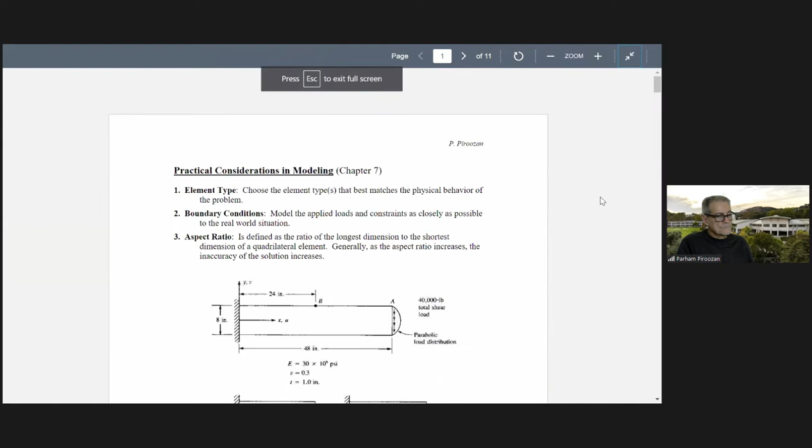Any questions before moving on to chapter 7 and talking about practical considerations in modeling here? This is module 13, we are here. All right, no questions. So today I want to discuss 11 items with you. No formulas, no problem solving, of course, for chapter 7.

This piece of our discussion comes before talking about heat transfer, but chapter 7 is practical considerations. No formulas, no problems, just discussions, but important topics we are going to discuss, which guide you how to model and solve, do finite element analysis. All right, so 11 items I want to discuss. Item number 1, and I want you to participate, ask questions, feel free to participate and tell me about the experiences you have and mistakes that you made or any questions you have.

Type of element is very important. You have to always select the right type of element. So far, we learned about truss bar elements that we use for trusses. We learned about beam elements. Beam elements we use for both beam problems and also frames. And then also we learned about the triangular elements. These are for continuum elements, two-dimensional plane stress, plane strain problems. We use triangular, for example, elements.

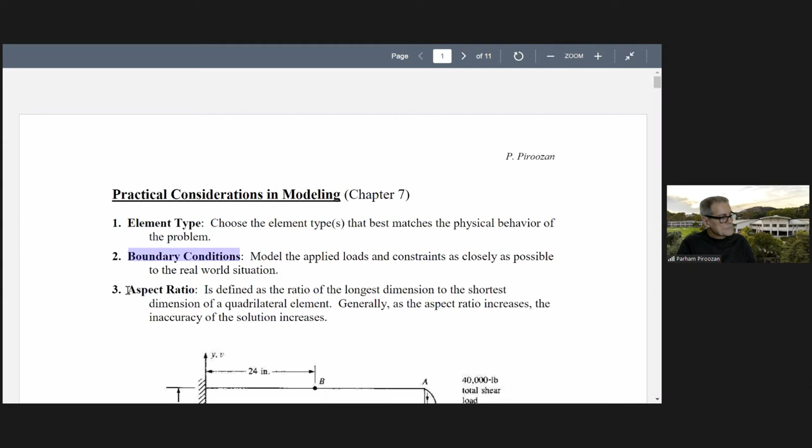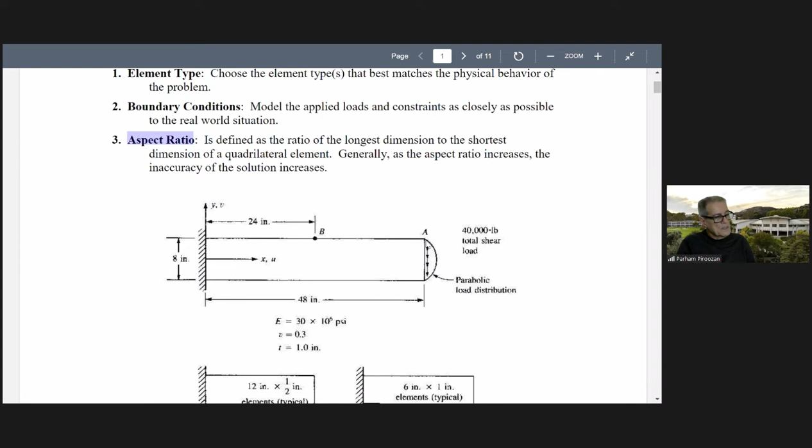Now, aspect ratio is another important topic. Look at this cantilever beam. It is fixed here, and we are applying this distributed load here, 40,000 pounds total force distributed like this. This is point A, point B. Now, let's select this element and analyze a couple of cases. One case is we are selecting an element like this. The total length is 48 inches and 8 inches. This element has a length of 12 inches by ½ inch.

Now, a definition, aspect ratio, it shows AR here. Aspect ratio is the ratio of this long side divided by this short side. So 12 divided by half is 24. And we can select another aspect ratio. Let's select this side 6 and this side 1. So aspect ratio is 6 divided by 1 is 6.

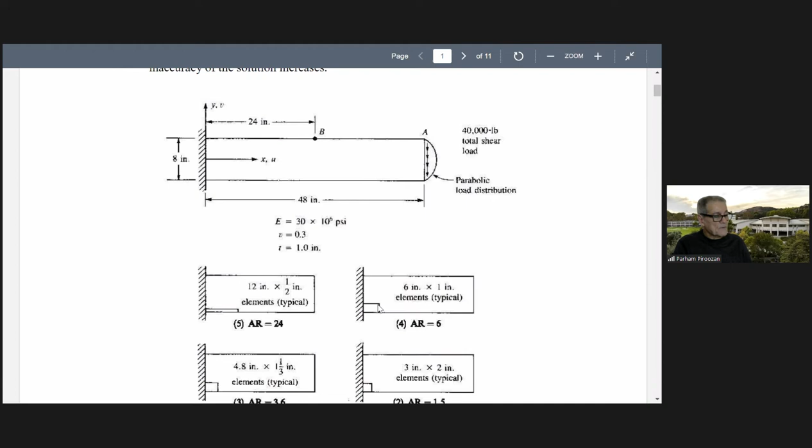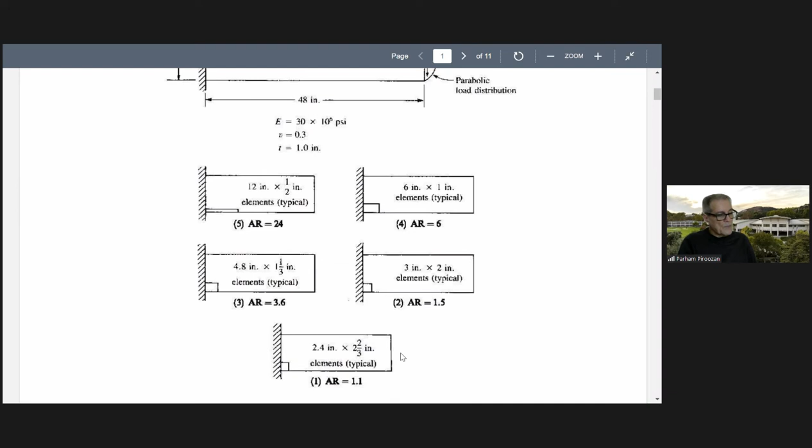Another one, aspect ratio of 3 by 2 inch. So this is 3 inch by 2 inch. So it makes it 3 divided by 2 is 1.5. And finally, this one, aspect ratio of 1.1. So we have several different aspect ratios.

We want to compare to see what results we get. This one would be the worst one. This one, not good. Don't select large aspect ratios. Stay close to 1. The closer you are to 1, the better your results will be.

Let's look at some numbers here. This is aspect ratio versus percentage error for the displacement at point A. Remember, this was point A here. This is error, this is aspect ratio, and this is the exact solution. When aspect ratio is high, it is 24, which was case 5, the error here is negative 55%. Our deflection is 55% less than the exact solution.

Another case, case 4, aspect ratio close to 6. Error is about, let's say, 25%. And as aspect ratio approaches 1, let's say here, aspect ratio about 1, we have just about 5% less than the exact solution. So you see that as aspect ratio approaches 1, our solution is closer to the exact solution. As aspect ratio increases, our inaccuracy increases.

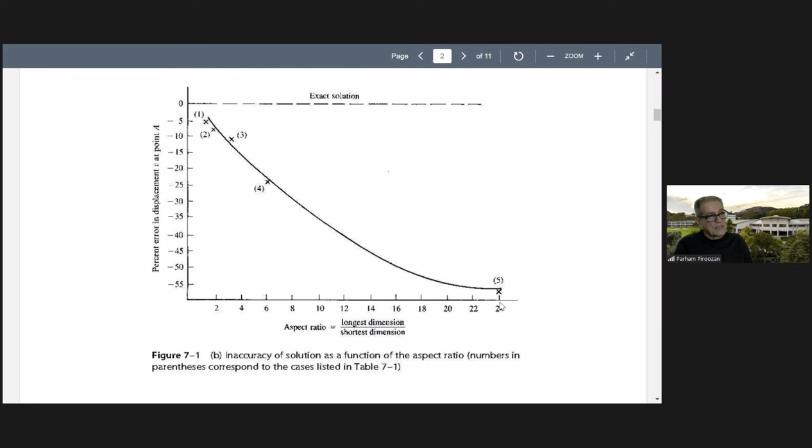All right, so this was one point I wanted to make. Another point of discussion here. This table also shows the numbers for different cases, different aspect ratios, 1.1 and 24. And these are the deflections. As you see here, deflection for point A.

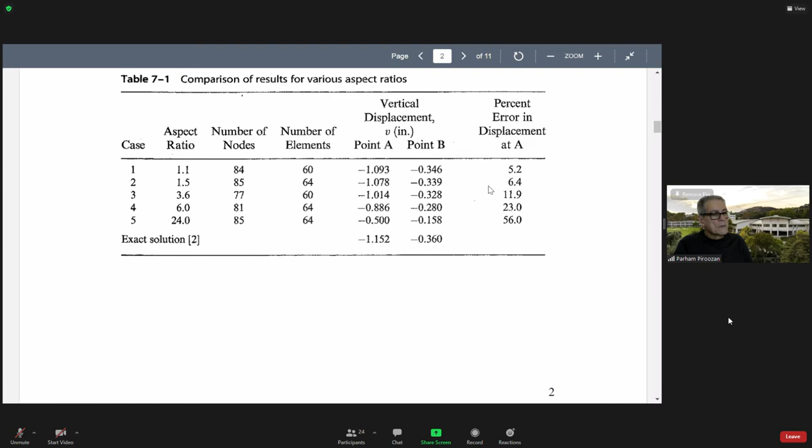Professor, can you hear us? The audio is off. Yeah, we're trying to talk to you. Hello? Let me see what the problem is. Well, I don't hear anything. If you have a question. Professor, if you can hear me, I have a question.

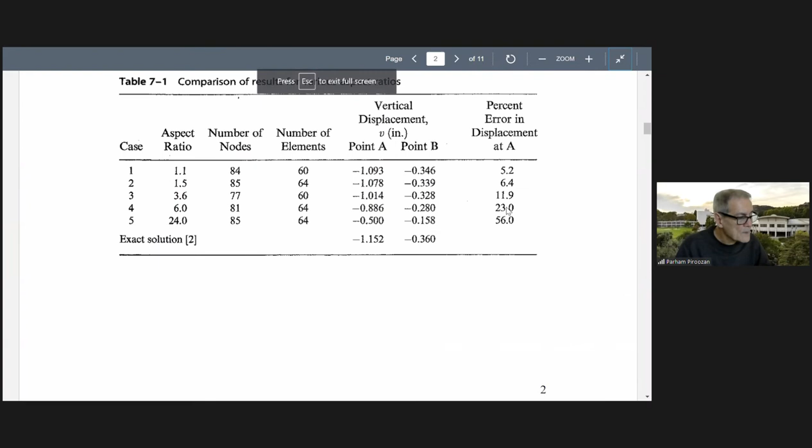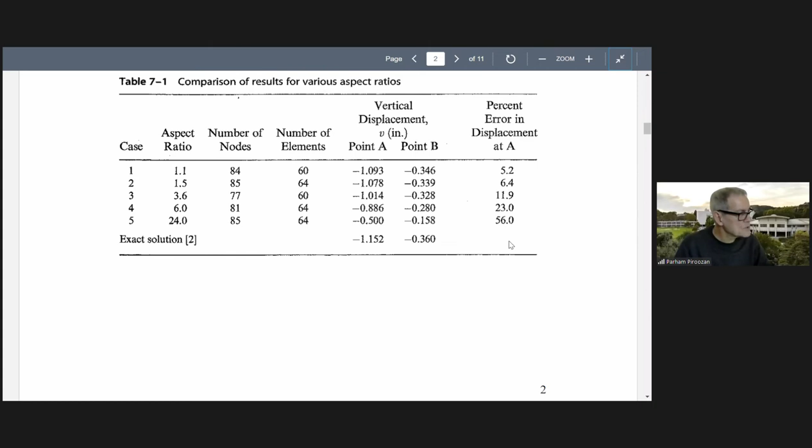Yes. So what is a reason that you would want a large aspect ratio? What are the arguments for a larger aspect ratio? Why don't we always just use one no matter what? I'm sorry, what is the question again? In what scenario would you want a larger aspect ratio? Why don't we always have an aspect ratio of 1? Always stay close to 1. We never want large aspect ratio. Don't do that. That's what we are saying, that this is bad. So there's no consideration, we would never want an aspect ratio larger than 1 for any reason?

No, but of course we cannot get exactly 1 in some problems; we want to stay close to 1. Creating the mesh is also a little challenging, so we cannot make sure that all elements have aspect ratio of 1, but we stay close to 1. We never want a large aspect ratio, but we do our best to keep it close to 1. Okay, cool, thank you. Sure. Our goal is to keep it close to 1, but the geometries are complicated, so creating the mesh is challenging. We cannot make everything 1, but we stay close to 1.

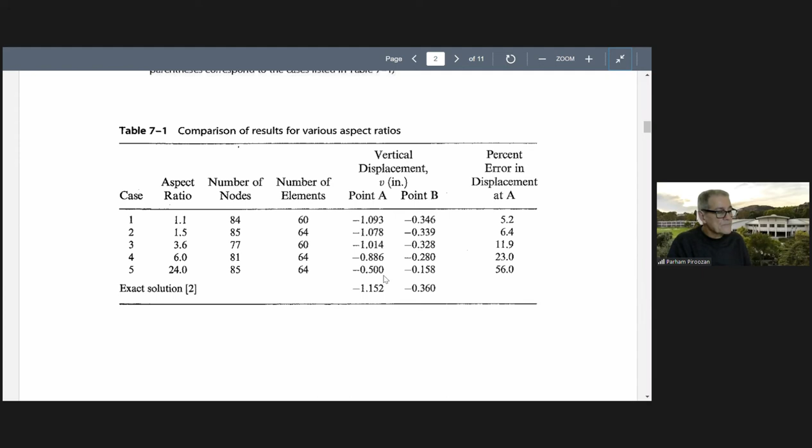For example, as you see here, we had aspect ratios of 1.1 and 1.5. These are fine, these are acceptable. But going here, these are not good. Staying close to 1, as you see, the deflection percentage-wise... Here, the exact solution for displacement is negative 1.152, negative 1.078. So here it is okay, but then it is not good. For larger aspect ratios, it is not good. We get better results when it is close to 1.

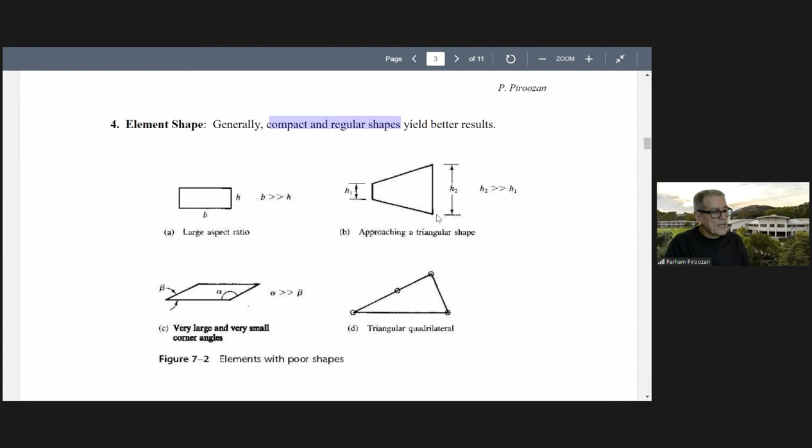Item number 4, a little continuation of that one. Make sure that these elements are compact and regular shape. Avoid extreme scenarios like what we discussed, for example large aspect ratio, B divided by H; keep it close to 1. If B is much larger than H, it is not good. If it's trapezoidal, make sure the ratio of H1 and H2 is close to 1, otherwise it is a more irregular shape. For this one, make sure angles alpha and beta are close to each other, not like one angle is 10 degrees and the other is 170 degrees. That would be very bad.

Some programs actually give you a warning. They tell you that this element, for example element number 1500, is distorted too much. It means the difference between this angle and this angle is large. So the program gives you a warning sometimes. This is not good.

And something interesting about this one: look at this one, tell me what is happening here. That's your job. It's a quadrilateral, but one of the nodes is collinear with the other two, so it's just a triangle. Very good, you're right. This was supposed to be a quadrilateral. A quadrilateral has 4 sides: 1, 2, 3, 4. But these 2 sides became collinear, along the same line.

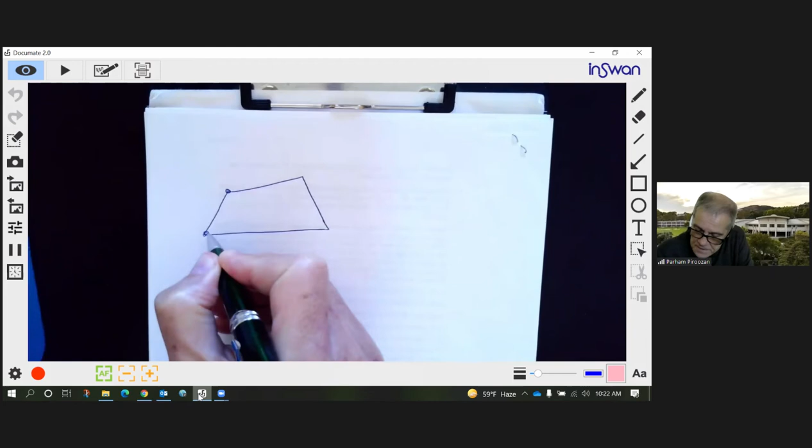So let me make a drawing. Let me use the camera. You should see the camera on your screen. Am I right? Yes. Okay. Suppose we have this element. This is this node here, this node, and this is fine. But suppose that this node somehow comes along this one, and we create something like this. So this is a quadrilateral.

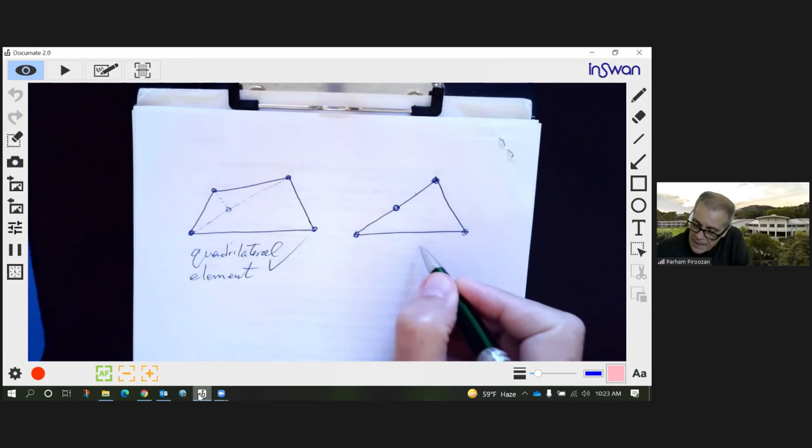This quadrilateral element is fine. We don't have any problems with this one. But something happened that this side, this is one node here, and this one came and became collinear. These 2 sides were here. This one, it is not good.

Now, why is it not good? Well, let me explain this a little bit more. This element that you see here, it has 4 nodes.

Now, one of the assumptions in our finite element formulations is that there is a one-to-one mapping. This assumption is important. Now, if we violate this one, then we don't get correct results.

Now, what it means is that if you select 2 points in this element, let's say I select this point here and this point here, connect these 2 points, all the points along this line should fall within the element. This is the assumption of one-to-one mapping. So this is correct. If you select another point here connected to this one, so all the points along this line are within the element. That's correct. That's fine.

But suppose this case, how to make this one, let's say like this. This is also a quadrilateral element, is it? This is 1, 2, 3, 4 sides and 4 nodes. This is bad, not acceptable.

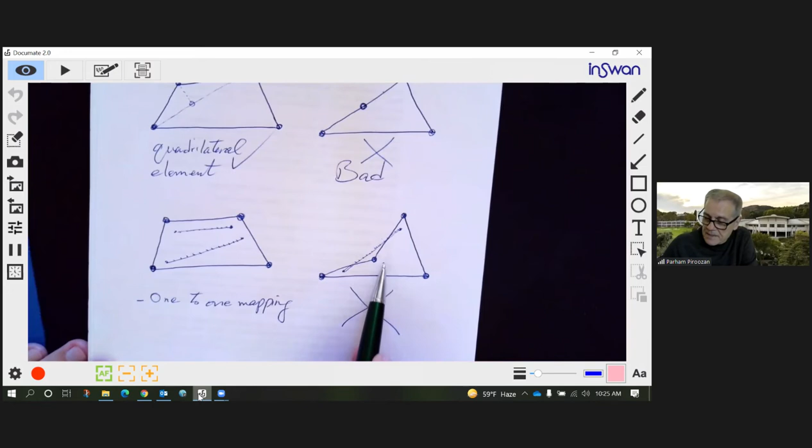Why? Well, because if you select this point here and this point here, and then if you connect these 2 points, the points along this are not all of them within the element. You are exiting from this element and then coming back again. So that is not acceptable. We are violating the one-to-one mapping. So that is not correct. The formulation, we are violating the formulations that we had. So this is not acceptable.

Now, a little bit more, see what is happening here. The discussion of having a regular type element is because of this. You see, when we have our aspect ratio, suppose we have this element. It's a long aspect ratio, it's a large aspect ratio. Now, the point is that when we do numerical integration, these types of elements, the B matrix, elements in the B matrix, they are functions of X and Y. So to find the element stiffness matrix, we have to term by term integrate.

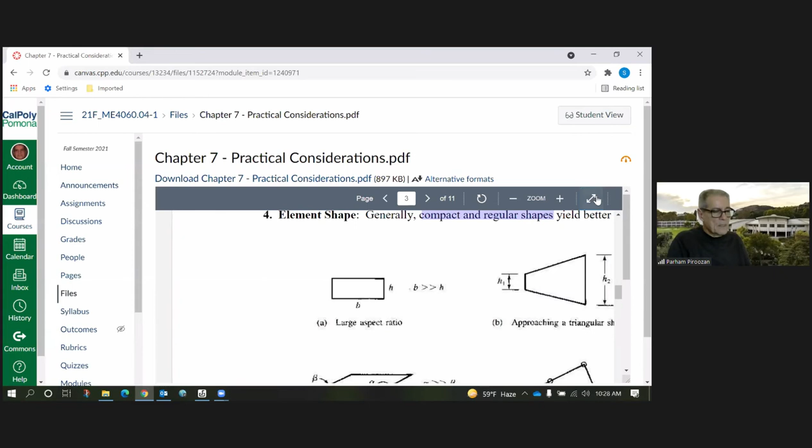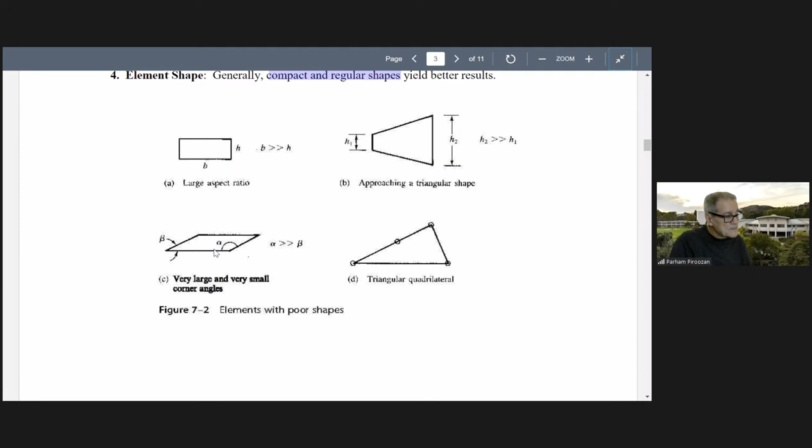All right, so now with this one, let me stop the screen sharing this video and go back to Canvas. So that was this discussion here, that we want them to be regular shape, not like these extreme cases. Again, numerical integration of these things do not give very good results when it is folding like this or this one.

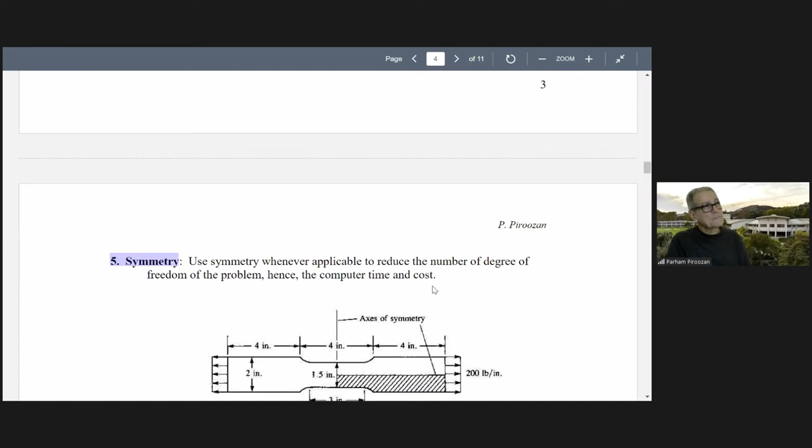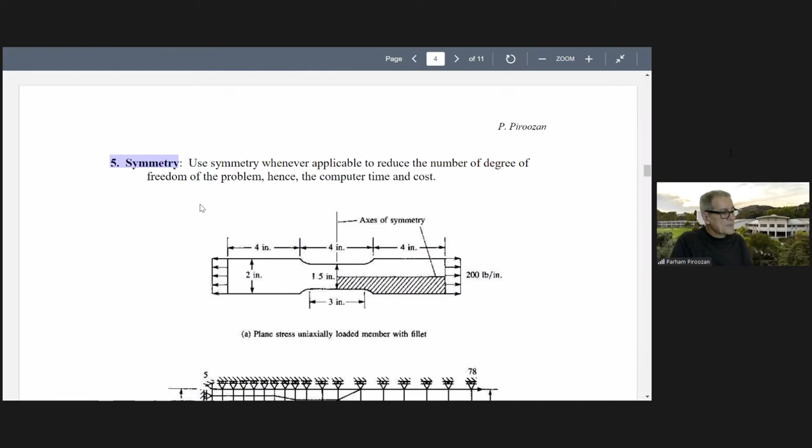All right, item number 5. I said, how many items are we going to discuss today? How many items are we going to discuss today, anyone? 11. 11 items. 11 items. So that was number 4. Now, number 5, symmetry.

Use it. Use it whenever you can. We discussed this symmetry in our class also before. But here, for example, this is a tensile test specimen. This is the specimen that you see here. We are applying the tensile force here. Instead of considering the whole thing, just consider 1/4 of this.

A quarter of this will do the job. But when you consider symmetry, you have to pay attention.

All the points along this would be on rollers, because these rollers allow these points to move in the X direction, but not in the Y direction. And these points along this plane should be allowed to move in the Y direction, but not in the X direction. So fix it in the X, allow it to move in the Y direction. And for this particular point here, at this corner, this point will not move in the X direction and in the Y direction. This particular point is fixed here.

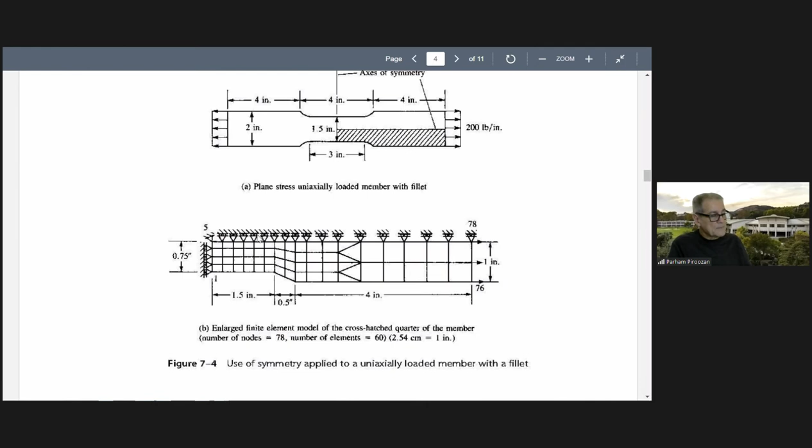But all other points along this are on rollers. And this one is also on rollers to allow it to move in the Y direction. So always use symmetry whenever you can, but pay attention that you have to put them on rollers if you are considering symmetry like this.

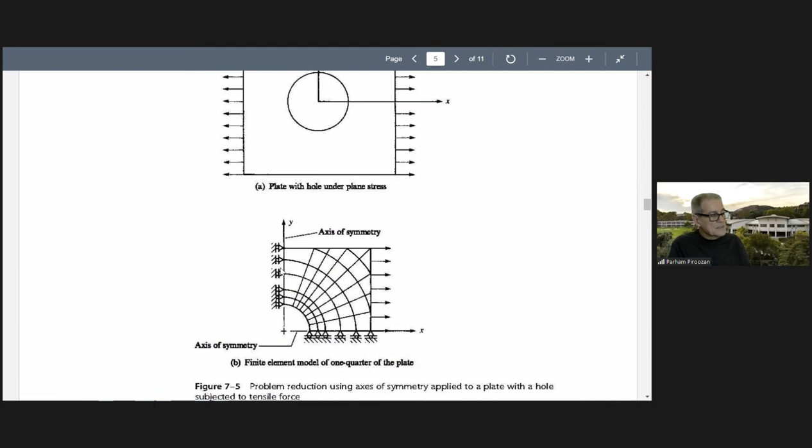Another example is this plate, for example, with this hole here, we are applying this tensile force. Instead of considering the whole plate, we can just consider a quarter of this, but again use rollers to model these two sides. All right, that was our discussion on item number 5, symmetry. Questions on this, or move on?

All right, let's move on to item number 6, subdivisions at discontinuities. Whenever geometry changes, or whenever loading changes, or whenever there are concentrated forces or moments, consider having a node at that point, or for separating these regions.

A couple of examples here. For example, we have a concentrated... yes, there was a question about symmetry in the chat.

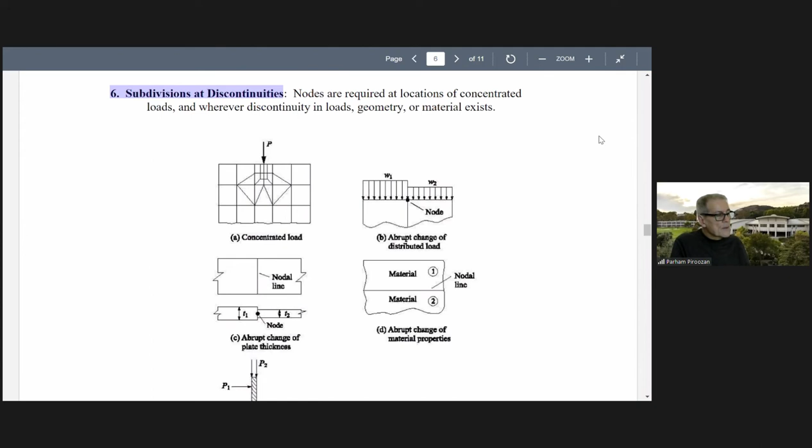Question: why exactly do we use rollers for symmetry? Well, here, of course, in our class, we discussed this one. You see, these points, this point here can move in the X direction.

Let me ask you a couple of questions so we can understand it better. These points along this line, can they move in the X direction when we apply this force here and here? Yes or no? Yes. All right, you are right.

Can these points move in the Y direction? No, there's no force in the Y direction. These points cannot move in the Y direction.

So if we want to consider symmetry and use a quarter of this, you see this hatched region, this is just that piece. If you just want to analyze this one, then we have to make up for breaking this. We are cutting this material here and removing this.

So we have to do something about this boundary condition, to model this quarter the same as the whole piece, as if it was the whole thing. It's just a quarter of the whole thing. If we want to model this quarter, it should behave the same as the whole piece behaves. When we are cutting this, we have to replace it with something. You can't just cut this without doing something about it.

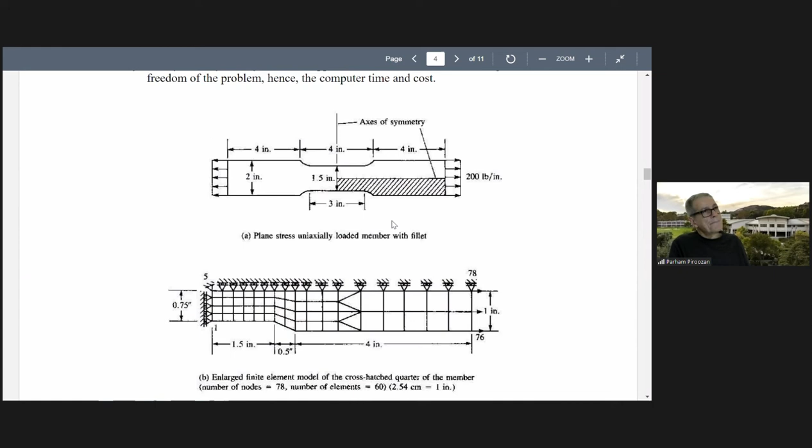Any other questions about symmetry? All right, very good, good questions. So this is this one.

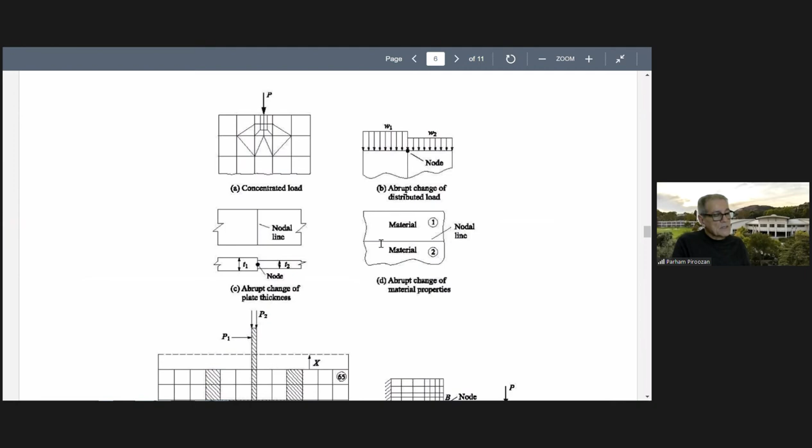This one, thickness of this piece here, you see this plate has two thicknesses, T1 and T2. You have to separate these two regions. Material changes, material 1, material 2. You have to separate them by selecting nodes along this, so this region is separate from this region.

This problem, the implant. Nowadays dentists do implants, it's more routine work for them actually. This is the bone, this is the jaw, and then the dentist cuts this, removes this, and implants a new material. I don't know exactly whether it is the material, possibly I think titanium, possibly they use, or that was maybe expensive a little bit, but maybe different materials. They use another material and implant it into the bone and put a post here. Then they put a crown on top of this one. So then that's it, and there's a new tooth now.

But this is the implant, so this is a different material than the bone here. So we have to define this. All these elements are different, they have different material properties, and we have to define these regions by these nodes, so they are separate from this base material.

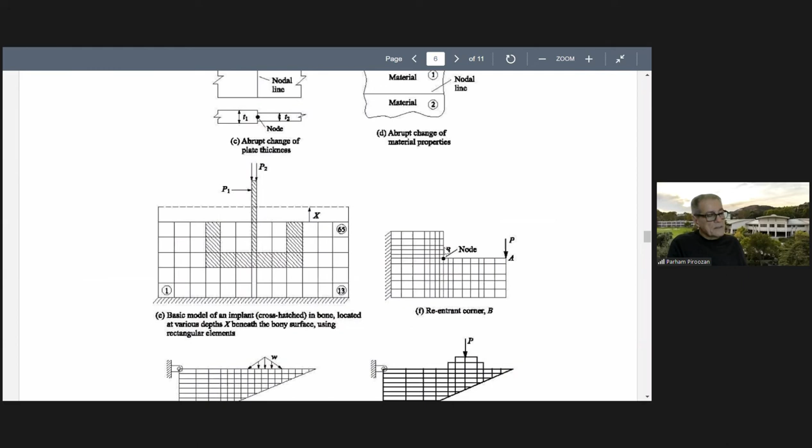This one, you have to, of course, geometry is changing, so put a node here at this intersection. Another point here, you have a distributed load like this, triangular. And nowadays, of course, all these computer programs can model this, but sometimes if a program cannot model this, you can extend these elements

outside of this structure itself, like this. So when you apply this load, actually this load will cause a load distribution on this structure which is the same as this one. So this is also acceptable replacement in your modeling. This also resembles this one. But nowadays these programs, all of them, like FEMAP, ANSYS, all of them, you can define this type of distributed loading, and you don't need to extend these elements out like this.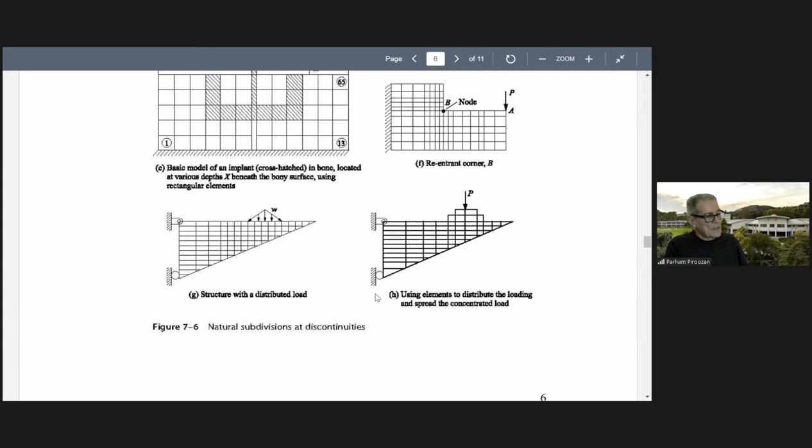But the point here was, whenever there are discontinuities, geometry changes, material changes, or your loading changes or so, you need to specify nodes and separate them from each other.

Now, element size. We did it many times in our activities. Remember, you were running the problem again, and we were saying, okay, this time now use half the element size, make the element size half, and then run it again. Remember, we did it several times. And you saw the difference between these different cases when we changed the element size.

What was it? When you were making this element size smaller, was your result more accurate or less accurate? Question for you, anyone? More accurate, more accurate. You are right.

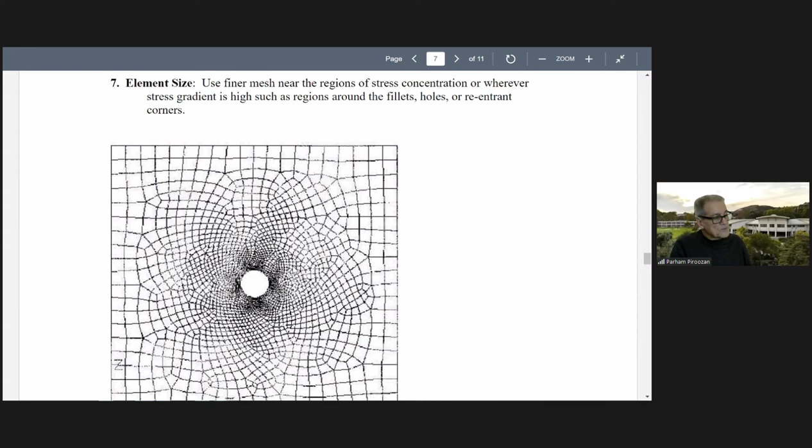Element size: make the element size, make the mesh finer around the discontinuities. Whenever there are holes, whenever there are discontinuities in the material, make the mesh finer so you get better results. Farther from where we have stress discontinuity, that's fine, but larger elements would be fine. But where stress is changing rapidly, whenever you have stress concentration, these are basically points where we have stress concentrations, so stress is changing rapidly here, have more elements.

All right, so let's, all right, now, in general, we have two types of elements. One is called H element, and one it is called P element.

Now, what is the difference? FEMAP, by the way, didn't have both of them. FEMAP just had H element. It didn't have P element. Now, what is this H element? Most programs have H element.

This one means finer mesh, but low degree of polynomial to approximate the, let's say, displacement over this element, or low degree polynomials for shape functions we end up with. So this means finer mesh, more number of elements, but low degree polynomial to approximate the solution.

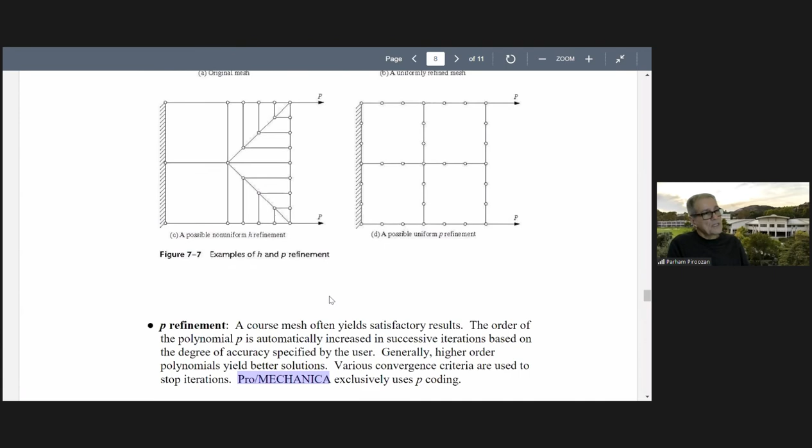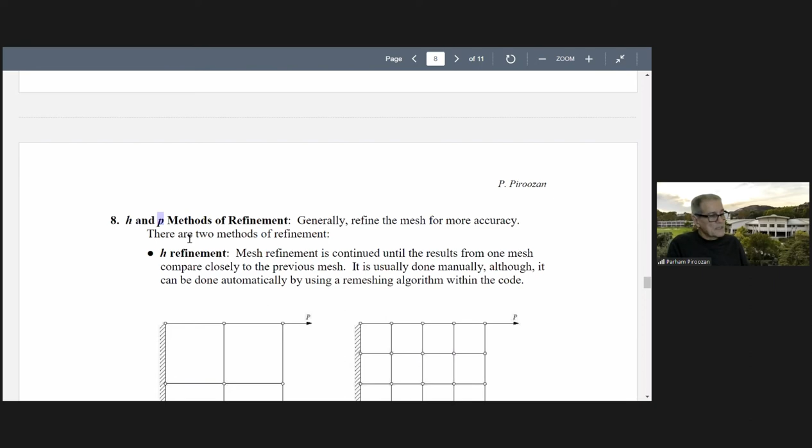A program like Pro/MECHANICA, for example, just uses exclusively P coding. Most programs use H. Some programs have the option of either P or H, like ANSYS. In ANSYS, a window opens, it asks you, is it H element or is it P element? But with P element, you always have to check, for convergence, that it has converged. Otherwise, this solution is not acceptable.

All right. Any questions, or are we ready to move on?

All right, move on. Connecting different types of elements. Sometimes we have beam elements and we have a plate element. They have 2 different degrees of freedom. Degrees of freedom for a beam element are not the same as for this plate element. So what should we do? This is a beam. It has degree of freedom in the Y. And it has this displacement and rotation also here.

So displacement and rotation. But this doesn't have rotation. This is a plane stress, plane strain problem. It has just degrees of freedom for displacement in the X and Y. No rotation degree of freedom. That's what the problem is. So how do we match them now? Well, one way to do this is to extend this beam into this one, so it can carry the displacements in the X and Y. So this moment can be transferred now here.

Otherwise, this moment could not be transferred here because there is a rotation involved because of this moment, and this cannot handle it. But here it allows this moment to be transferred like this. Nowadays, of course, programs do not have this problem. They take care of it themselves. Before, engineers doing the finite element stress analysis had to do this, sometimes even connecting this point to this point and this point, or extending it either way.

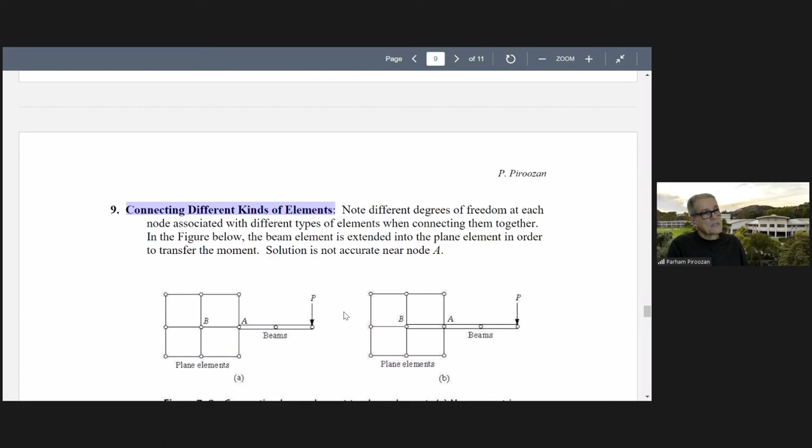But nowadays programs have a function, and actually ANSYS does this automatically. There is no need to even specify anything. You specify that this is the beam element, there's a plane element, and the program inside takes care of this rotational degree of freedom. All right.

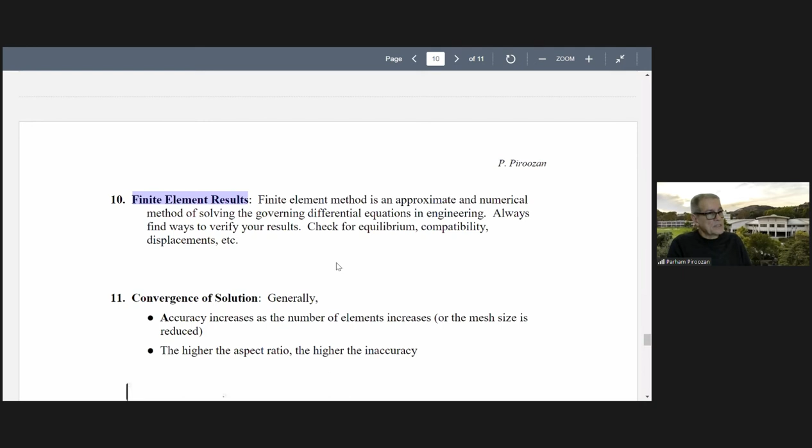Finite element method. Question for you. Is the finite element method an approximate method of solution of differential equations, or is it an exact method of solution of differential equations? Approximate. It's approximate, but it doesn't mean that we should be skeptical about this. Absolutely not. With these advanced types of elements and with these computers with more memory and more accuracy, better algorithms, in many cases they match the exact solution.

And those that do not match the exact solution, it is very, very close, and these are absolutely acceptable results we get. But nevertheless, always find ways to check and verify your results. After all, these are numerical methods. We have to always find ways to verify our results. And you did it in the activity, you checked equilibrium.

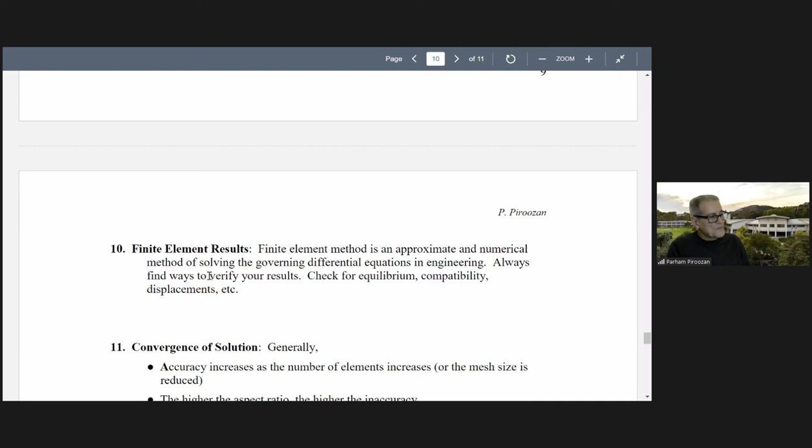Remember from the beginning when we solved some of these problems, frames or so, I was asking to check for equilibrium. And you were checking the reaction forces that you were getting with the external forces and moments, to make sure that our solutions make sense, our input was correct. So compatibility, check for displacement; all the time you were practicing with plotting deformed and undeformed shape. That's what I wanted you to see, if it makes sense or not. That was all to verify your results.

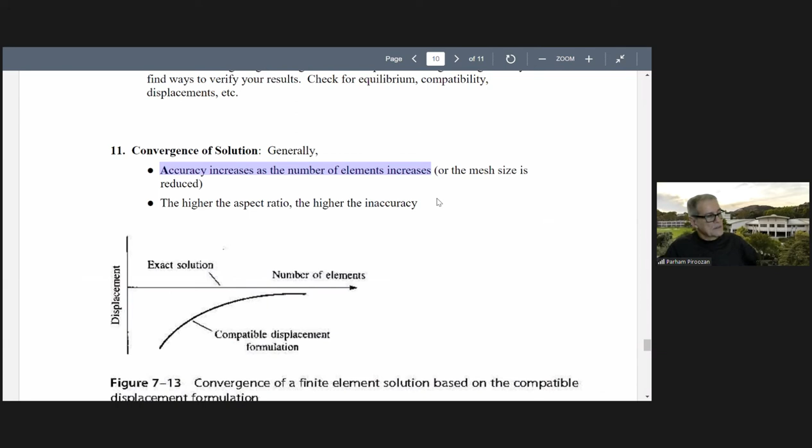And finally, this is the last item. Convergence of solution, 2 points here, very important. Always accuracy increases as number of elements increases. So the finer the mesh is, the better results you get. The general formula is like this. And also, we talked about aspect ratio, keep it close to 1. Don't let aspect ratio be 20, 30 or so. These are absolutely not acceptable, and it is not correct.

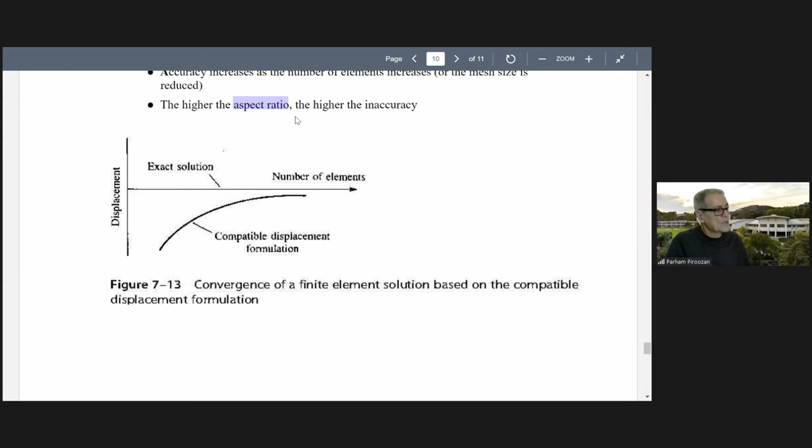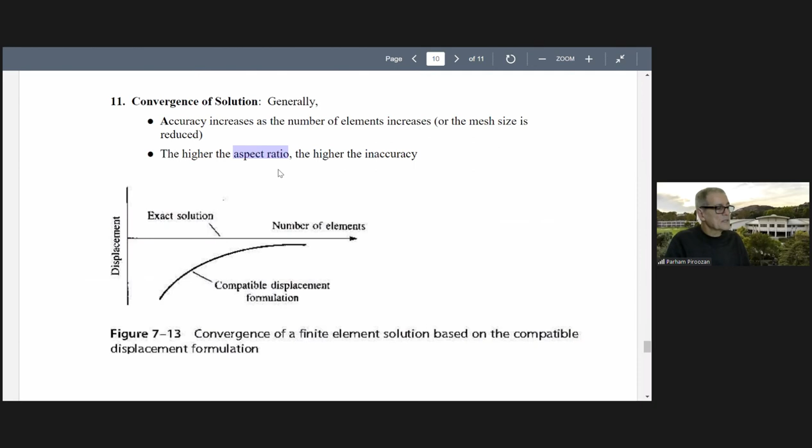So these 2 points, you can see it from this figure. This is displacement, let's say exact solution for displacement. As number of elements increases, you see that we are converging. Compatible displacement formulation. We are approaching the exact solution as number of elements increases. So that is what this point is. The finer the mesh, the better results you get. General formula. And the higher the aspect ratio, the higher your inaccuracy.

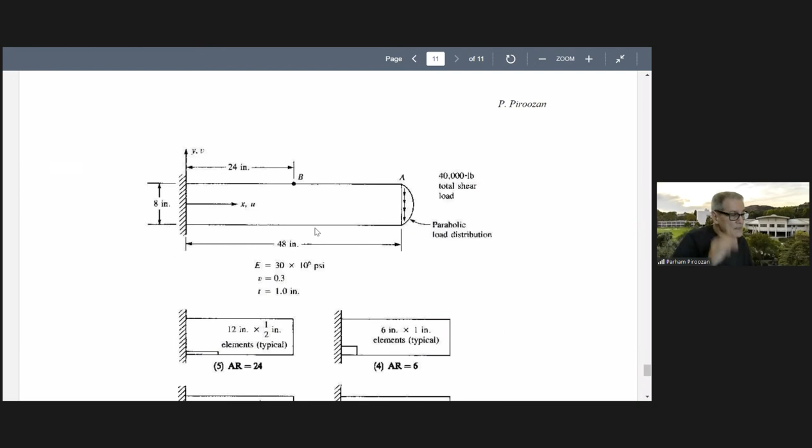That's all the points I wanted to say, these 11 points from chapter 7. And this is the example that I showed you. We checked the aspect ratio of 24, 6, and we saw that the best was when aspect ratio was close to 1.1. And this is the result. You see aspect ratio. You get better results when it approaches 1.

All right. And the finer mesh here, let me see number of elements. You see here, these are coarse mesh, but this is finer mesh, and aspect ratio is acceptable, 1.2. So you see very good result. The exact solution is negative 1.152, and it is negative 1.1. So we get good results as the element size is smaller and the aspect ratio is close to 1. All right, that's all the 11 points I wanted to discuss from chapter 7 of our textbook.

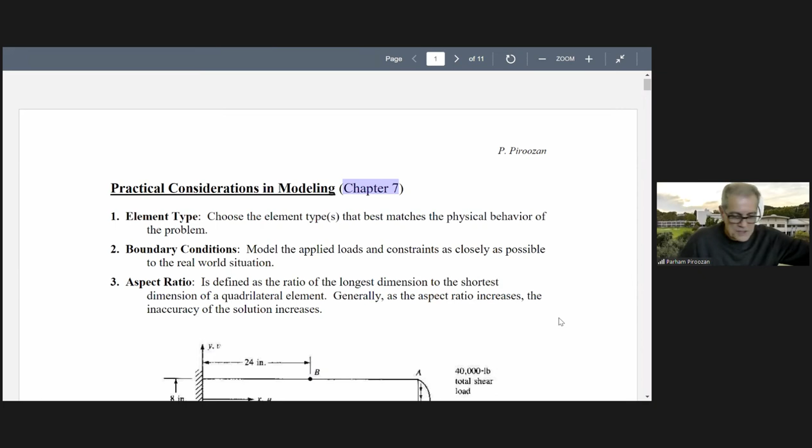Any questions about these 11 items? All right, no questions, which means we are ready to go back to modules. We are here, November 8th. We finished with chapter 7. Let's go to heat transfer, our discussion on heat transfer.

Heat transfer is not a prerequisite for this class, so I start from the beginning, although it is good to have this prerequisite of heat transfer. We finished our discussion with solid mechanics problems. Now, time to switch to heat transfer problems, one-dimensional and steady state, the simplest one. If you don't have the prerequisite for heat transfer, that's fine. I start from the very basic. We start and then we move on to 2D later. But whenever you have questions, as always, feel free to ask.

One-dimensional heat transfer problem. This is a wall. This is solid, a wall separating two fluids, fluid 1 at temperature T1 and fluid 2 at temperature T2. So this wall has length L separating these two fluids. Suppose temperature T2 is greater than temperature T1, so heat will flow from the high temperature region to the low temperature region. So here, from fluid 2 by convection to the solid. So this is the mode of heat transfer.

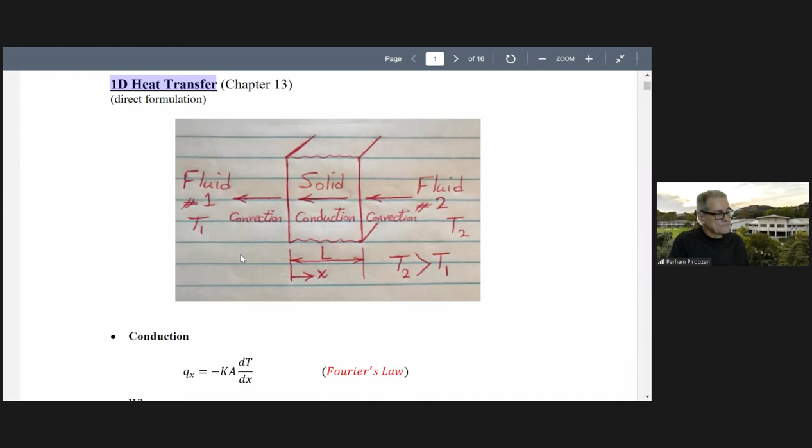In general, we have 3 modes of heat transfer: conduction, convection, and radiation. Convection is the transfer of heat between a fluid and a solid. Through the solid, heat is transferred by conduction. And again, from this solid to this fluid, it would be by convection again. So we have convection, conduction, and again convection. Now let's look at each one of them. Today we are going to look at finite element formulations for these one-dimensional steady state heat transfer problems, and then look at an example problem. That would be our goal today.

For conduction, the equation that governs this behavior is Fourier's law. It says Qx is negative kA dT over dx. This is the rate of heat transfer, Qx. Its unit in SI is kilowatt. In US customary system of units, it is BTU per hour. Can anybody tell me what BTU stands for? British thermal units.

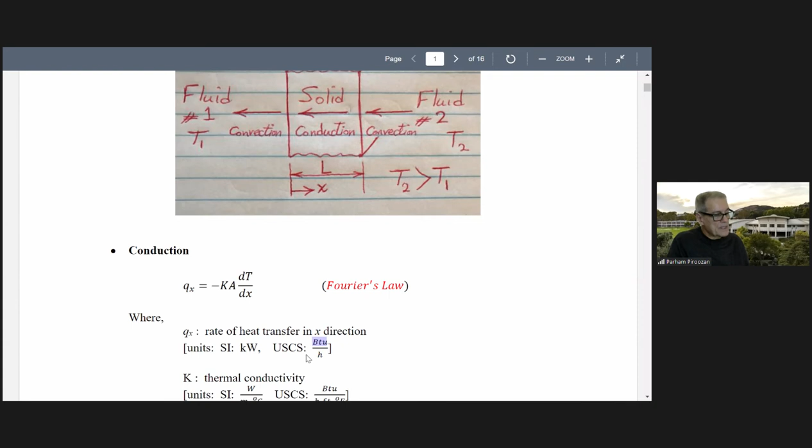Very good, you're right. This is British thermal units, and it governs the same as in SI kilowatt. This is the formula for conduction. K here is thermal conductivity, or conduction heat transfer coefficient. Its units in SI are watts per meter degree centigrade; in the US customary system of units, it is BTU per hour foot degree Fahrenheit. This is area. So this is area and a coefficient multiplied by temperature difference.

Now, a little bit about thermal conductivity. Let me see. Any of you cook at home or not? Anyone doing cooking anytime? Yeah. All right. So when you cook, let's say we want to make spaghetti. Now, if you want to make spaghetti, of course, we have to heat water, boil water.

So we have, let's say, pots and pans. Let's say a pot from copper or from stainless steel. Which one would you choose? The pot from copper or from stainless steel? Which one would you choose? Stainless steel. Why did you select stainless steel? Because that's what a lot of pots and pans are made out of.

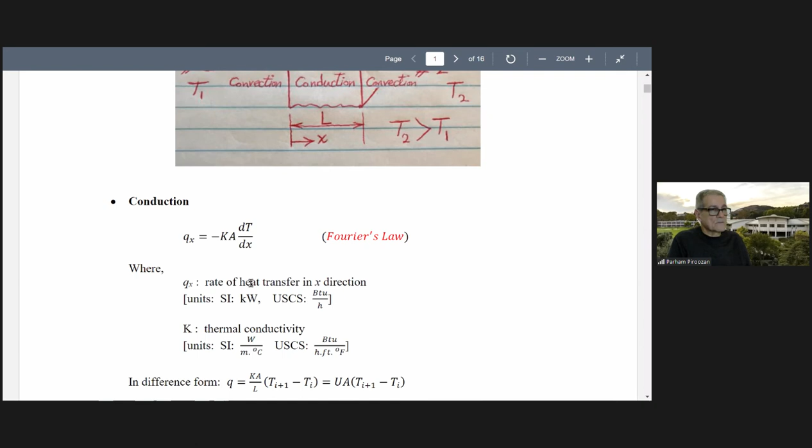For example, if you want to heat 1 quart of water in copper, let's say it takes 10 minutes, and in a stainless steel pot, it may take half an hour. If it takes 10 or 15 minutes in copper, it will take maybe 30 minutes in stainless steel. So the thermal conductivity of copper is better than stainless steel. So from this point of view, copper is better. Copper is more expensive, of course, but very professional cooks possibly use it.

But the good thing about stainless steel is it always stays clean, and it has very high resistance to erosion, corrosion, abrasion, washing them all the time. So it always stays shiny. So stainless steel is more durable and stays clean, but not necessarily better for cooking. For cooking, the thermal conductivity of copper is better, so some chefs prefer copper, and it is more expensive. Materials which have good thermal conductivity are also good conductors of electricity, like copper, for example.

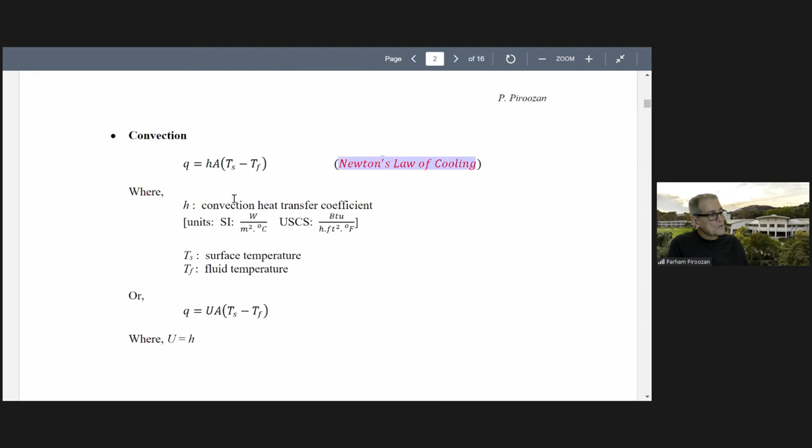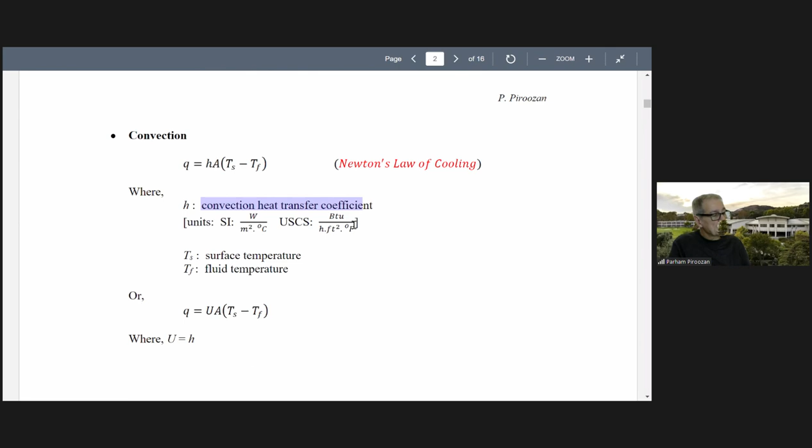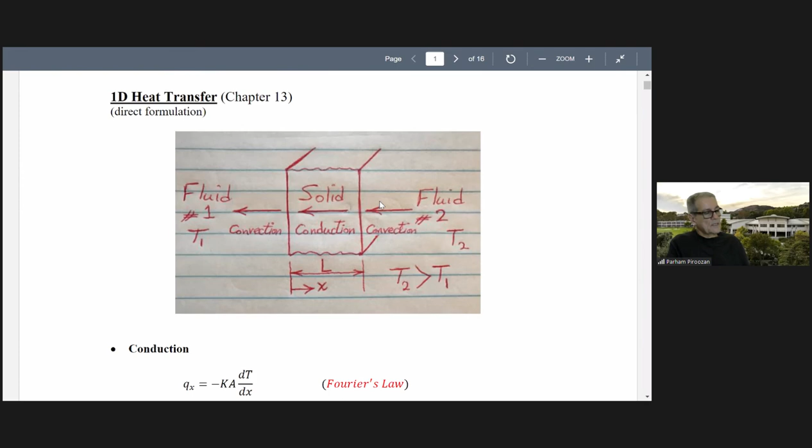Now let's look at convection. Convection is given by this formula: HA(Ts minus Tf). It is governed by Newton's law of cooling. H here is the convection heat transfer coefficient. Again, one coefficient, times area times temperature difference. Ts is surface temperature and Tf is fluid temperature. Here this would be fluid temperature, Tf, and this is the temperature of the surface, because heat transfer is taking place from the surface. So Ts and Tf, that takes care of convection.

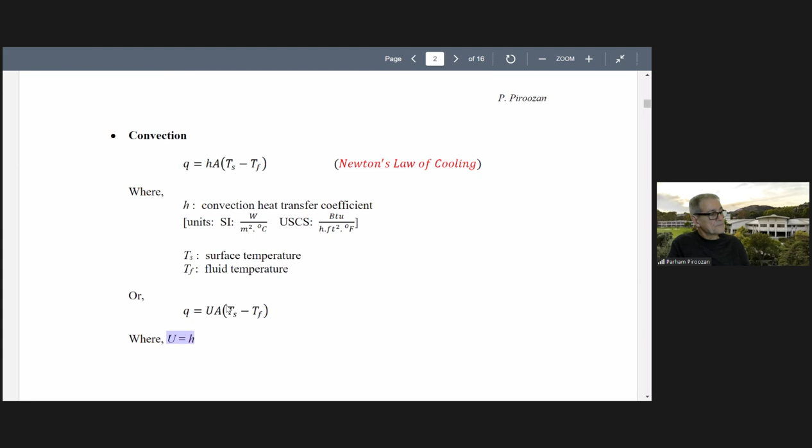Again, units in SI and US customary system of units. We can write it as UA(Ts minus Tf). Compare this one to this one: in this case, U is just H. Again, introducing this U factor. Now with this, let's look at the finite element formulation and then solve an example problem. For conduction, this is the same as this wall; this is node i plus 1.

Temperature at node i plus 1. Heat into this element is given by this. By conduction, we said it is kA over L times Ti minus Ti plus 1. And for this one, it is kA over L times Ti plus 1 minus Ti.

Now, rewriting them at node i and at node i plus 1, we can write them in matrix form. These two equations in matrix form are like this: kA over L times 1, minus 1, minus 1, 1. This is the temperature vector, and this is the heat flow vector. These are Qi and Qi plus 1 here.

Like what we did in solid mechanics, everything is very analogous to solid mechanics. That's what we emphasized a lot in solid mechanics, but now we can easily adapt everything to heat transfer and even to a large degree to fluid mechanics. The root of all of them goes back to solid mechanics. This one is very similar to what we had before.

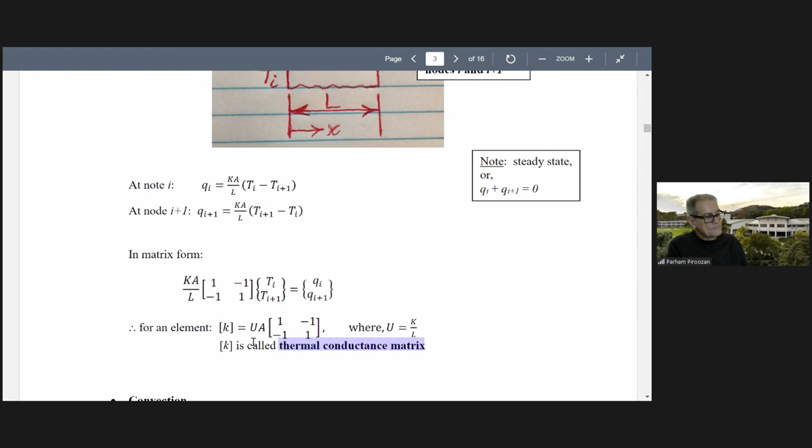This is called the thermal conductance matrix or simply the element stiffness matrix, because solid mechanics dominated the field of finite element methods. So we just call it the element stiffness matrix. All right, this is for conduction.

Let's do the same for convection, very similar to this one. For convection, you can write hA times 1, minus 1, minus 1, 1 times the temperature vector is equal to this. This one, again using the U factor, k is UA times 1, minus 1, minus 1, 1. This is our element stiffness matrix, but for a convective element.

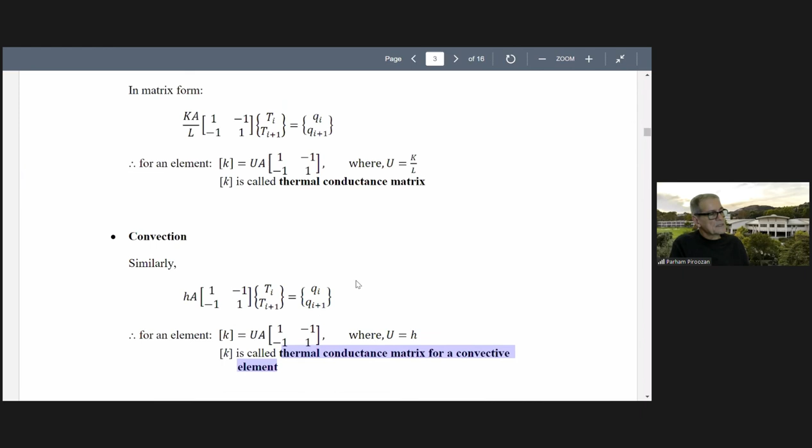In other words, in the language of heat transfer, it is the thermal conductance matrix, the same as the one we had for conduction. But this one is for a convective element. For a convective element, we have UA times 1, minus 1, minus 1, 1, the same as this one. But U here is k over L, and here it is simply h.

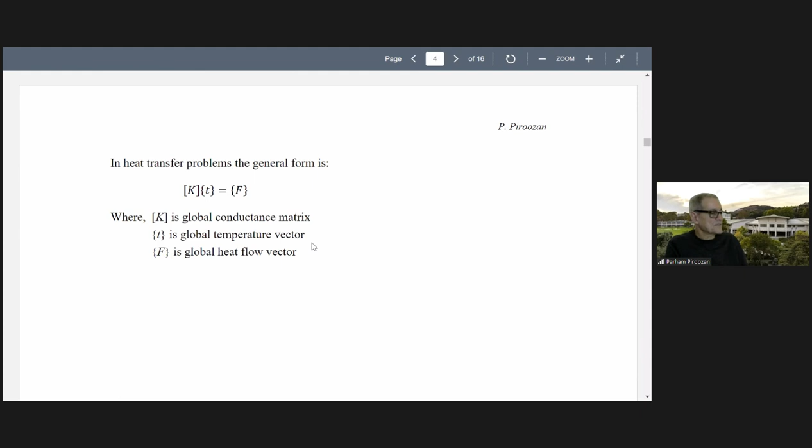And finally, in heat transfer problems, the general formula is always KT equals F, very similar to solid mechanics. In solid mechanics, we had KD equals F. In heat transfer problems, we have KT equals F. This K is the global stiffness matrix or global conductance matrix, T is the temperature vector, and F is the global heat flow vector, or force vector in solid mechanics. That is the general formula in heat transfer problems, very similar to solid mechanics. That's all I wanted to discuss.

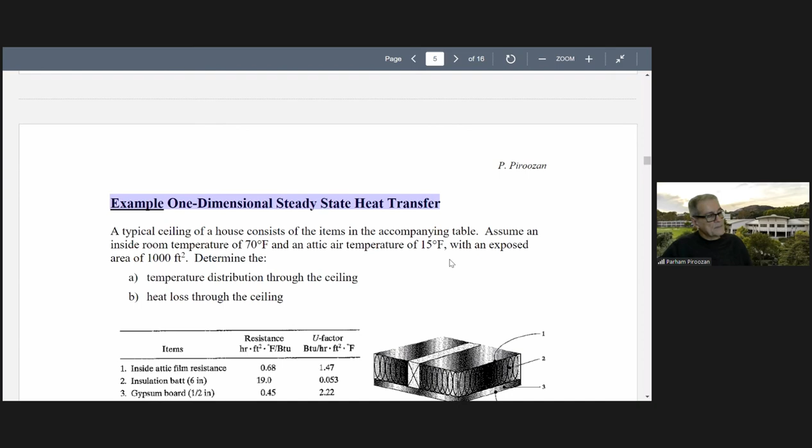Before looking at this example problem, applying it to this one-dimensional steady-state heat transfer problem, a practical problem actually, any questions? All right.

A typical practical problem, actually. This is a roof of a house. It consists of gypsum board, and this is insulation. This is our room here at, let's say, 70 degrees Fahrenheit, we are given. This is the wood and insulation, and this is an attic here at 15 degrees Fahrenheit.

So this is what the problem is. Typical ceiling of a house. Assume inside room temperature is 70 degrees Fahrenheit. Attic air temperature is 15 degrees Fahrenheit. And 1,000 square feet is the exposed area. We want to find the temperature distribution through the ceiling, to see how temperature is changing through the ceiling, and also the heat loss through the ceiling.

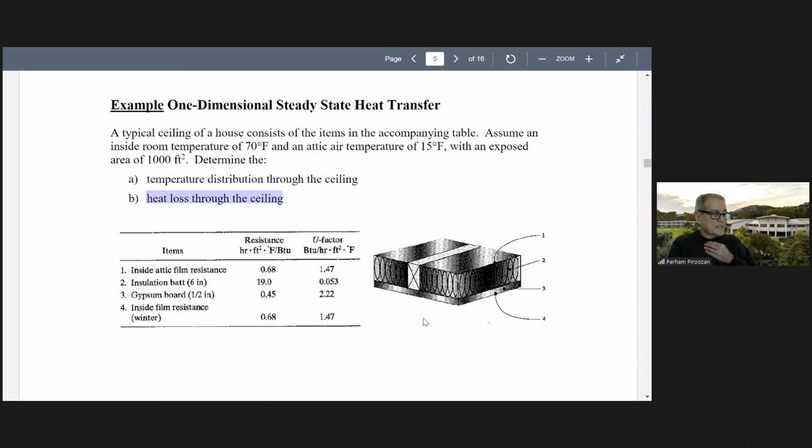We are given these properties here. Inside attic film resistance. These are the U factors. So from the attic to the surface here, U is this. The insulation, 0.053, this is through the insulation. The gypsum board, half an inch, its U factor is 2.22. And finally, resistance from convection from this board to the air in the room. So these are the U factors given. I have a figure here also to possibly make it easier to see.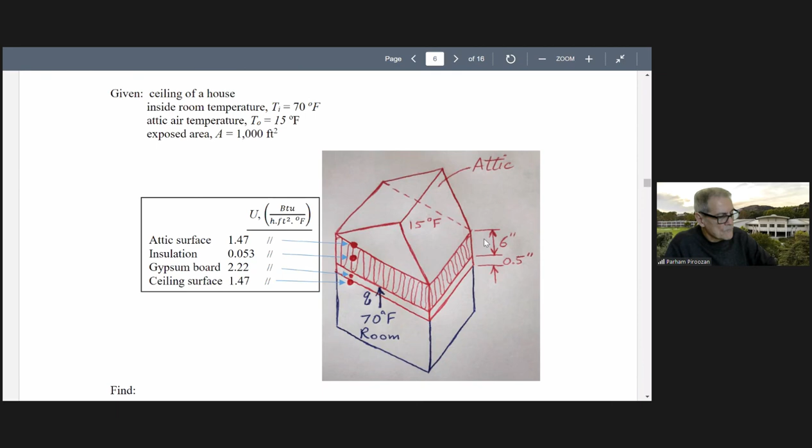And U's are given. U for element 1, 1.47, and this is for the insulation here. This is for the gypsum board here, and this is for between the ceiling and the inside of the room here. That's it. How many degrees of freedom per node? Question for you. Anyone? How many degrees of freedom per node do we have? Would it be 2? Why 2? What are the 2? Any other ideas? Anyone? The question was, how many degrees of freedom do we have per node?

It'll just be one. You're right, just one. Temperature, just temperature, yes, at this node there is just one temperature unknown. There is no temperature in the X direction or in the Y direction. This is a scalar, it's temperature at this point. So 1 degree of freedom per node. And there are 5 nodes. So our global stiffness matrix or global conductance matrix should be 5 by 5. And this is what you see here.

This is T1, T2, up to T5. So this is also T1 through T5. And it's got the right-hand side, Q1, Q2, Q3, Q4, Q5. Now, element 1 goes here, U1, negative U1, negative U1, U1. And element 2 sits here, element 3, and element 4 comes here. So this is the global stiffness matrix. And remember, there is an area here also. It was UA, so the area, we factored it out here. Plugging the numbers, U1 is 1.47, and U2, for the insulation, is here, and so on and so forth. Temperature vector, and right-hand side.

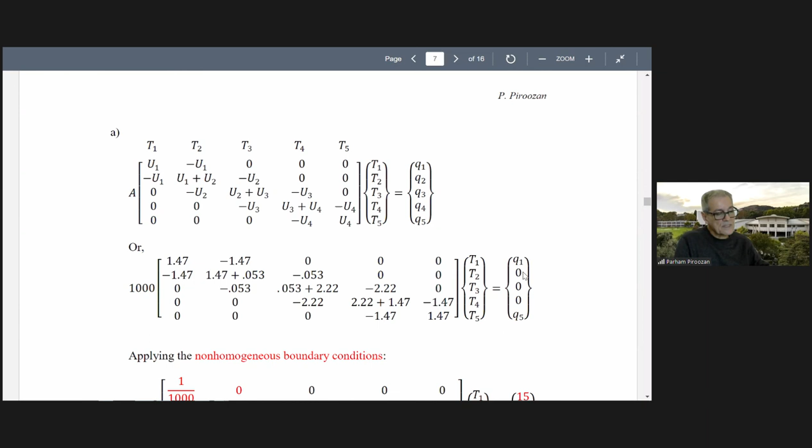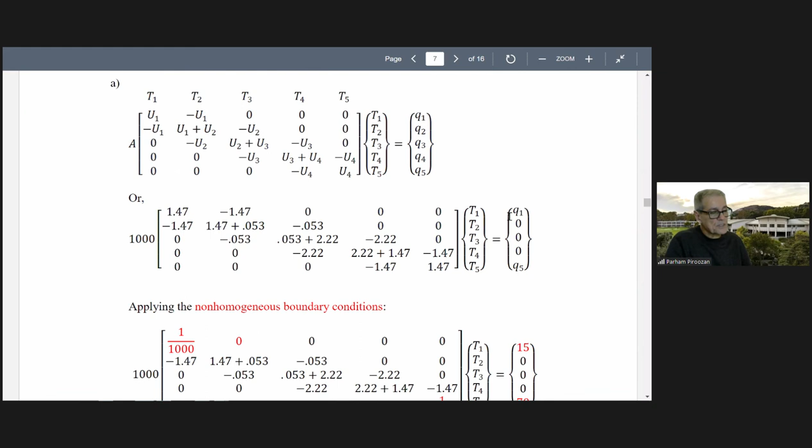This is node 1 and node 5. These are attached to boundaries, but these are internal nodes. You see nodes 2, 3, 4 here. These are internal nodes, so whatever Q comes here, it leaves also. So these are 0, but node 1 and node 5, like in solid mechanics attached to a wall, here they are exposed, they have fixed temperatures. So this is our system of equations, but we need to apply boundary conditions.

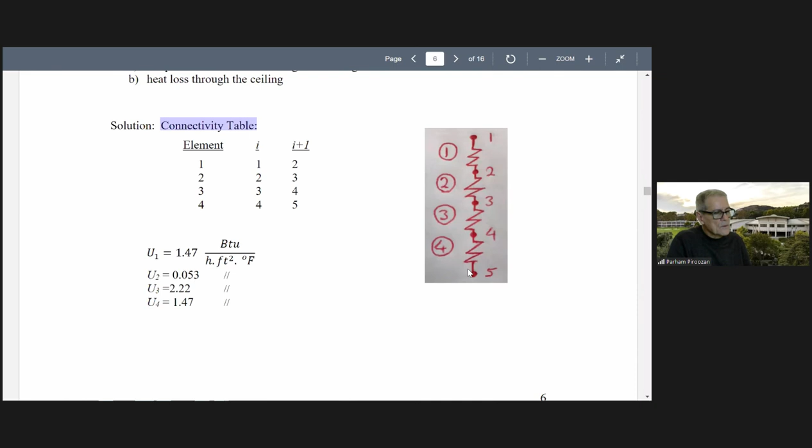Now, boundary conditions, temperature boundary conditions. What is the temperature at node 1? Temperature at node 1 is what? Fahrenheit. Yes, you're right. Temperature at node 1 was 15 degrees Fahrenheit. This was in the attic. And temperature at node 5 is 70 degrees Fahrenheit. So to apply the boundary conditions, this is our system of equations. These are non-homogeneous boundary conditions; homogeneous was when it was 0, but these are not. These are known temperature values.

At node 1, temperature is 15 degrees Fahrenheit. This is a non-homogeneous boundary condition. The way to apply this is by correcting our first equation such that it gives T1 is equal to 15. I've shown it in red so you can see that in this first line, I had to change it to 0. This one is multiplied by 1000, so I have to make it 1 over 1000. So when multiplied, it gives T1 is 15. That's what we need. T1 is 15, in the attic. That's how you apply the non-homogeneous boundary conditions. For homogeneous boundary conditions, remember, we just removed the row and column associated with that node. But for non-homogeneous boundary conditions, we do it like this.

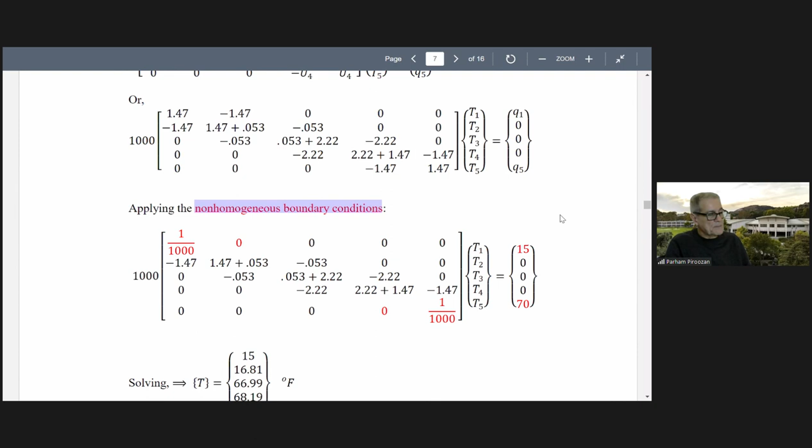It is ready to be solved by Nastran. FEMAP creates this one, hands it over to Nastran. Nastran solves it and returns this temperature distribution back. These are the temperatures: attic 15, room 70, and these are the temperatures that we wanted through the ceiling.

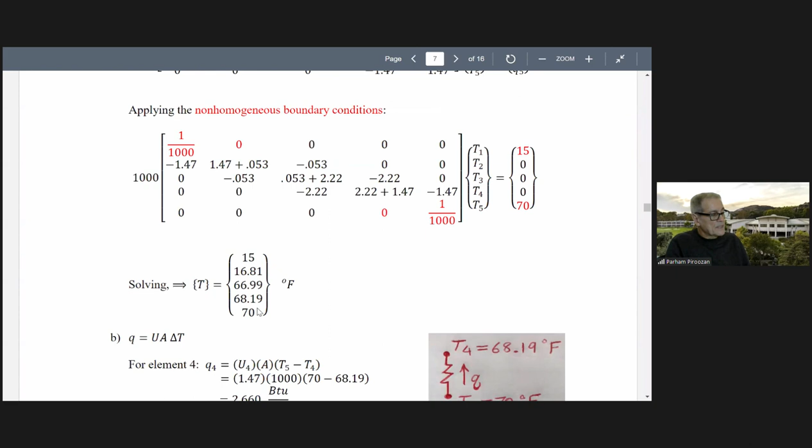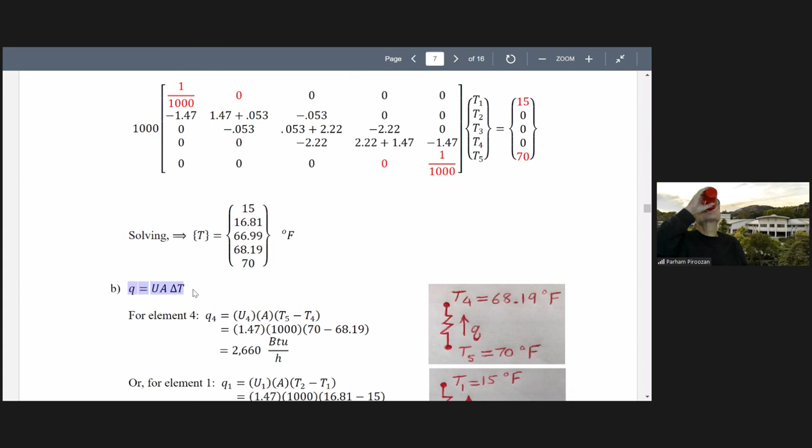All right, any questions before looking at part B of the problem, which was to find the heat flow through the ceiling? Any questions? All right, no questions.

This is the formula that we have: Q heat flow is UA delta T. For element 4, we find it for element 4. This was element 4 here, which is element 4 here. It is here between this surface and this one here.

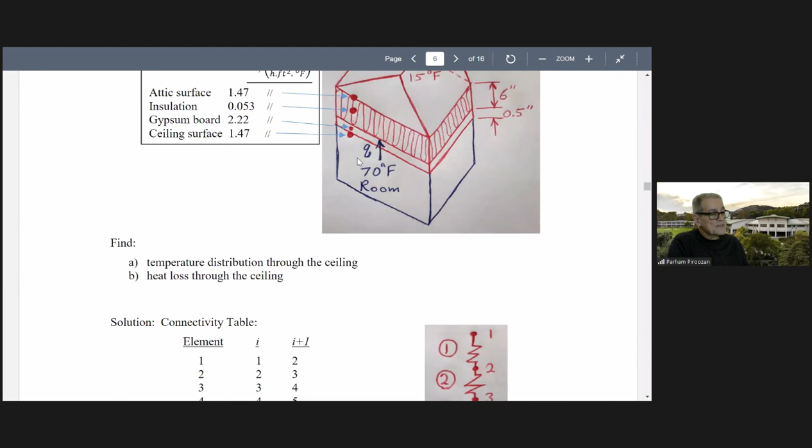So this is 70 degrees, and the temperature at this point, let's see what we got. This was 68.19. So this is for element 4 here, this is element 4.

70 degrees and 68.19 here we got. UA delta T, this is U for element 4, area, 1000, delta T, T5 minus T4, temperature difference here: 2660 BTU per hour. This is the heat flow through element 4.

You could do the same thing for other elements. For example, I did it for another element also. You can do it for other elements, select, see what you get. For element 1, this was from this attic here to the surface inside of the attic here.

This one, 15, and the temperature here that we found was 16.81. So for element 1 it is 15 and 16.81, UA delta T. This is U for this element 1, area, and delta T, we get the same 2660 BTU per hour.

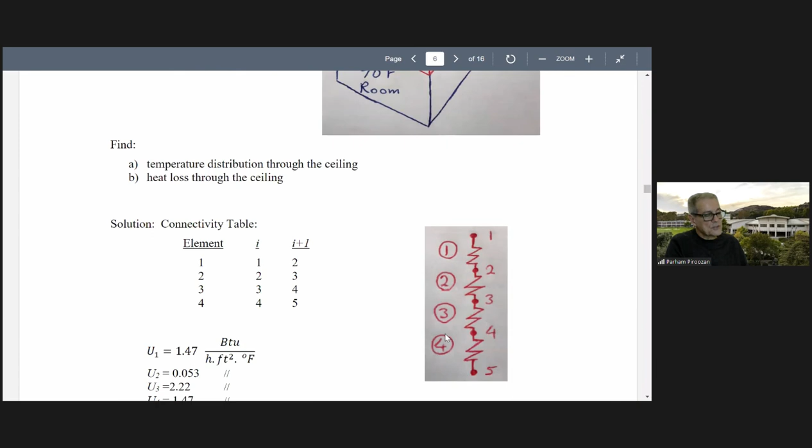That is the heat loss through each element. This is a steady state problem. Whatever heat passes through this element passes through this element, the same as here, and then goes to the attic. So this is steady state, and the heat flow through all of these elements should be the same. That's what you see here: for element 4 we got 2660, and for element 1 we got the same 2660.

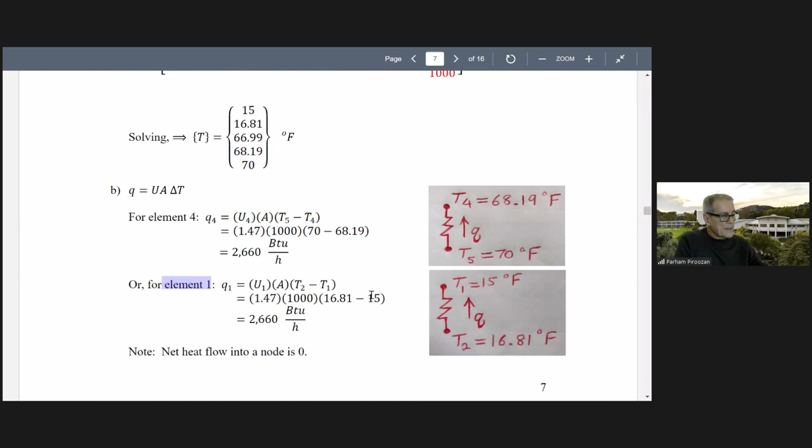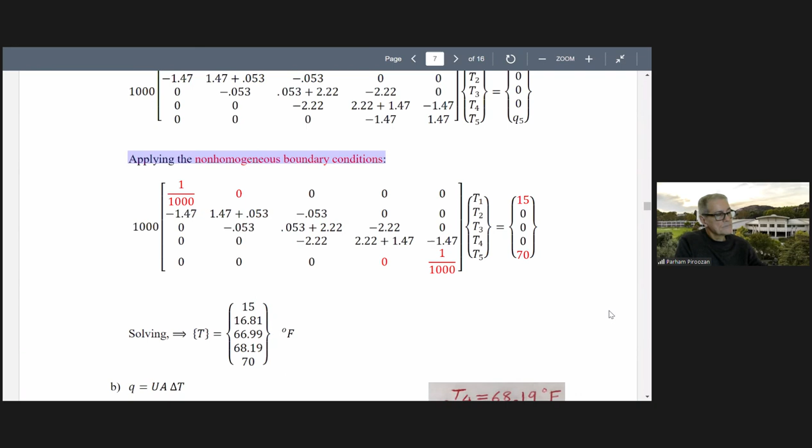All right. I don't want to go any more. This is for our next week. I don't continue and cover any more material. Any questions, anyone, about what we discussed? All right, I don't see any questions.

So this is briefly what we discussed: chapter 13, heat transfer, one-dimensional, steady state, and direct formulation. Later, we are going to use the variational method, a more comprehensive one. This is a simple derivation we did for conduction and convection, and we looked at one example problem. Before ending our discussion today,